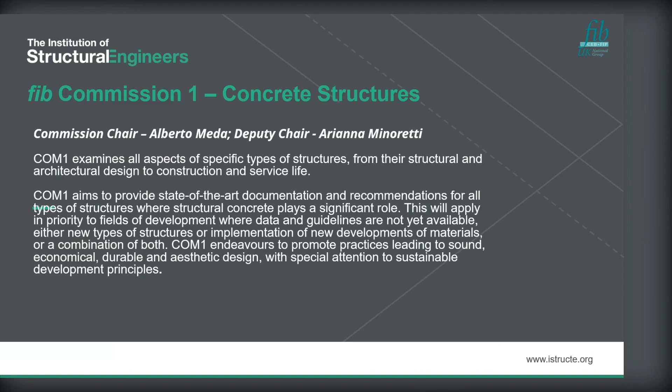Within each of the working areas, the aim is to output various things from the different groups. Each group works on different aspects, and the output will generally form the basis of guidance, recommendations, bulletins, or state-of-the-art guidance documents. The ones coming out within the next year or so are set out on this slide. I'll go into more detail on what we're doing in Working Group 1.1.3 for integral bridges, which currently has a document being drafted.

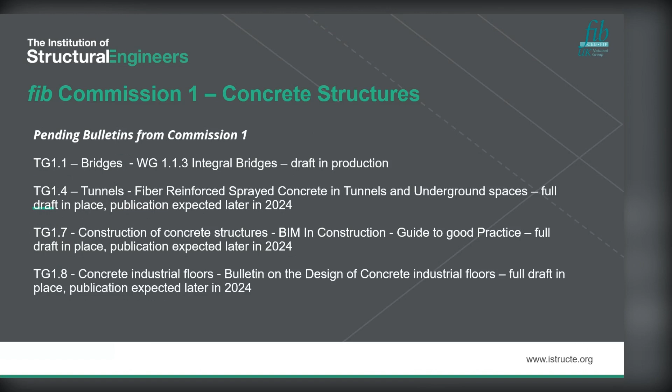Going into the detail of Working Group 1.1.3, there are 2 of us convening the group - myself and Alessandro Palermo. We have about 26 members within the Integral Bridges group from different regions of the world, 12 of which are active at the moment, actively contributing towards the state-of-the-art document we're producing.

The current state-of-the-art document is intended to pull together integral bridges design approaches from different regions of the world, highlighting how we do things similarly and how we do things differently. Most importantly, capturing how we do things so we can learn from each other, develop the best way of doing integral bridge design, and share that with the bridges community at large.

The main sections of this document will contain definitions, a general introduction, and the design basis - mostly focusing on performance criteria, loads and load combinations. It will look at analysis approaches, both simple methods and more detailed soil-structure interaction approaches for integral bridges, as well as design approaches adopted in different regions across the world. There will also be a useful section on common detailing practices and case studies.

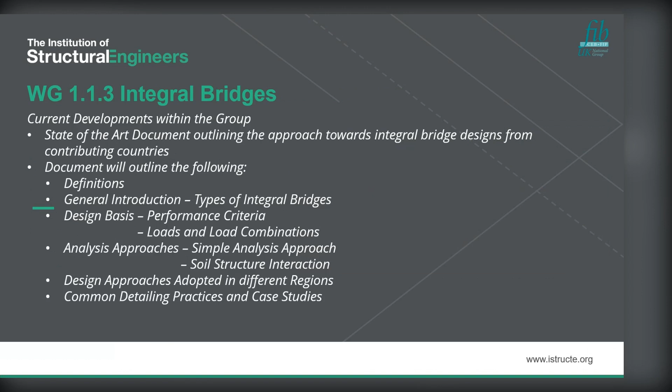Going back a slide, for those who don't know what an integral bridge is - it's basically a bridge that is all built in together. You generally have the foundations built into the abutments, with an integral connection between the deck concrete and the abutment concrete. This means you essentially remove the need for complex joints and bearings within the section.

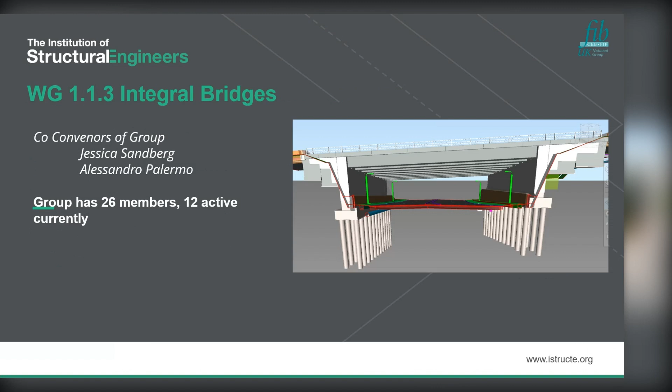The reason we tend to promote this is that it generally leads to lower whole life costs, less maintenance, and less disruption to the network. Most of our clients are quite keen on using these structures because it helps make road and rail networks easier and less disruptive.

I find this quite a useful slide as it highlights how different regions do things differently. We haven't got a full list of all countries yet, but this illustrates the general differences between some countries. For instance, Finland tends to do integral bridge design between about 50 to 90 meter spans, with steel being limited quite a lot more than concrete bridges. There's a general trend in many parts of the world where concrete integral bridges tend to be longer than steel ones.

The exception is probably the UK, where we don't really have limitations on the length of integral bridges depending on concrete or steel - it's just the same limits for both. Not all countries define the same limitations on when you're allowed to use integral bridges. Some define it based on movement range, and others on the total length of the bridge.

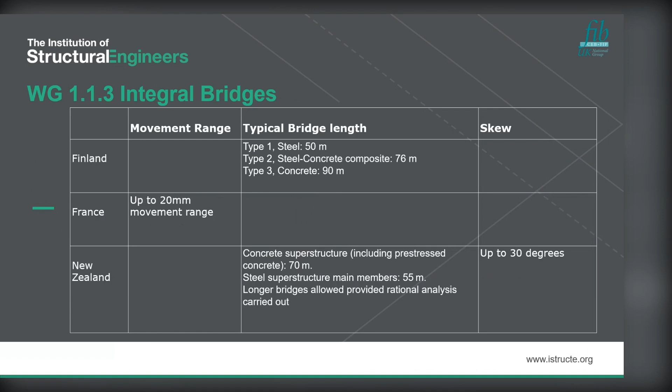And then there's also some limitations on skew. This slide goes on to give a couple of other limitations for other examples. The key outlier here is clearly the United States, where they build some very, very long integral bridges, though the length of the integral bridge tends to be state dependent.

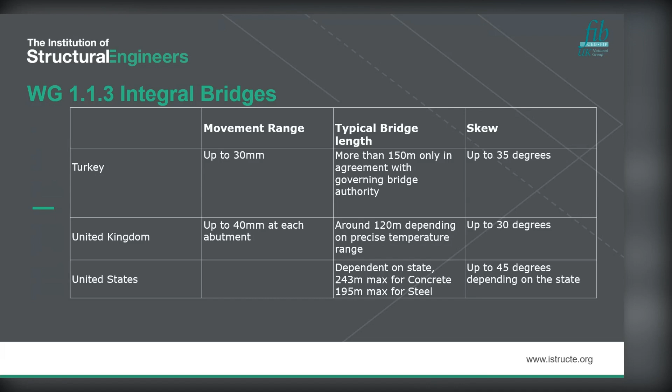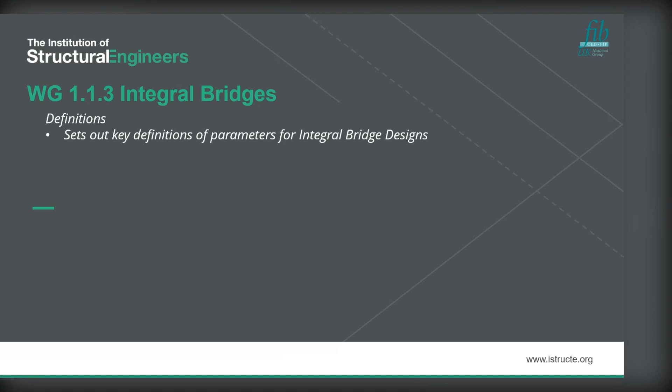Within the definitions, this is quite an important part of the state-of-the-art document, because we have to have an agreed set of terms that we use to define the structural design. It's taken a fair bit of work to get a set of definitions we can all agree on, because it turns out we all use slightly different terms and define things in slightly different ways.

You also have embedded wall abutments, which tend to be contiguous pile walls, used for top-down types of construction. Flexible support abutments are abutments where you've got a column that goes through a manhole ring or something similar that separates it from the soil, which then limits the amount of earth pressure that you mobilize behind the end of the abutment.

The earth pressure is the main component of the interaction between the soil and the structure itself. And then you've got semi-integral abutments, which are sort of integral bridges with bearings, but without the complex joints at the surface carriageway level.

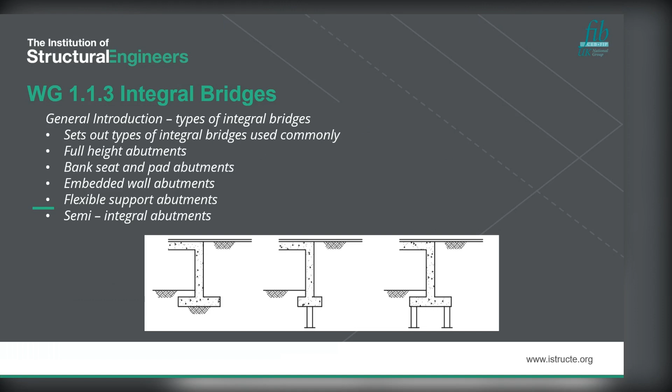There's some interesting work being done in France at the moment, where they are retrofitting some existing structures and turning them into semi-integral bridges. So bridges that previously had joints in the deck are being turned into semi-integral structures, which I believe is giving them a maintenance improvement on the road network they've got.

We will then have a section looking at the design basis, mainly focusing on performance criteria. This will focus on the fact that when doing integral bridge design, the flexibility and stiffness of both the structure itself and the soil tends to be quite important in determining the load effects you have, and the amount of thermal movement that you get.

So the expansion of the bridge causes the deck to move into the soil, mobilizing a semi-passive soil resistance that effectively mobilizes load within the abutment. The more flexible you can make the system, the less load you have getting locked into that system, and the easier the structure then becomes to design.

The key to this section will be how different regions address these issues of how we quantify the semi-passive soil resistance, which in the UK we refer to as the K-star soil pressure, and other regions tend to refer to as passive soil resistance, depending on the soil movement. It all depends on which region you're in.

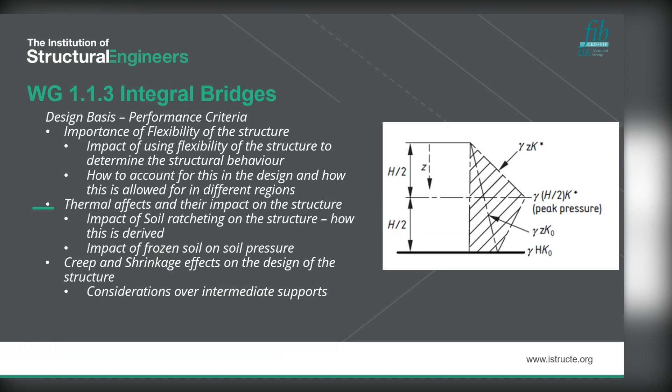So another thing the design basis section will look at is loads and load combinations. This might seem a little bit obvious, but it turns out that we all tend to consider temperature and soil pressures in different combinations depending on where you are. Not everyone considers temperature relevant to the ULS design, and a lot of regions will just look at the SLS combinations in terms of the temperature design.

That means that for an integral bridge design, because it's dependent on the overall expansion and contraction due to temperature, SLS will be the load combination that you design for. In the UK, we very much take the approach that temperature forms part of the ULS combination, and ULS will tend to form a large part of our design. So again, it's highlighting how this is treated differently and what the key components are.

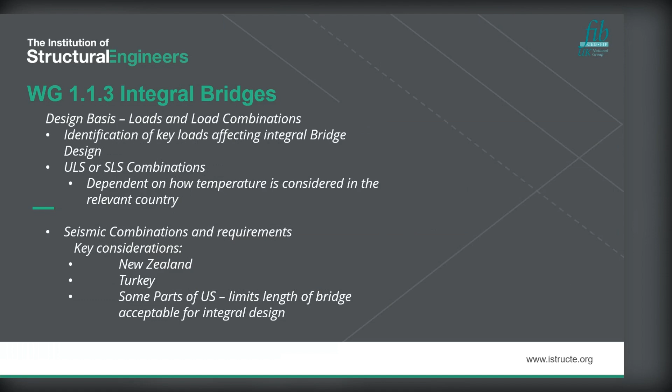It's also looking at the importance of the seismic combinations and how this adds additional considerations to your design. This was primarily coming out of countries like New Zealand, Turkey, and some parts of the US, where seismic actions are quite a lot more of concern than they are in places like the UK or Northern Europe.

The idea is also to look at different analysis approaches. In the UK, we use the limit equilibrium approach. In other regions, you use a modified passive earth pressure derived based on the temperature movement.

There's also some additional considerations when you go a little bit further north. For instance, Finland and other parts of Scandinavia have to deal with frozen soils, and those frozen soils mean that different earth pressures are then mobilized when you are doing the design of the structures.

That adds an additional complication to doing integral bridge design. It's also one of the reasons why lengths of bridges are a little bit more limited as you go further north in Europe, because the negative temperatures in the frozen soil lead to much higher earth pressures being applied to or mobilized by the structure as you get expansion into the frozen soil. So it's more applicable when you get into the ranges of around -20 and that sort of area.

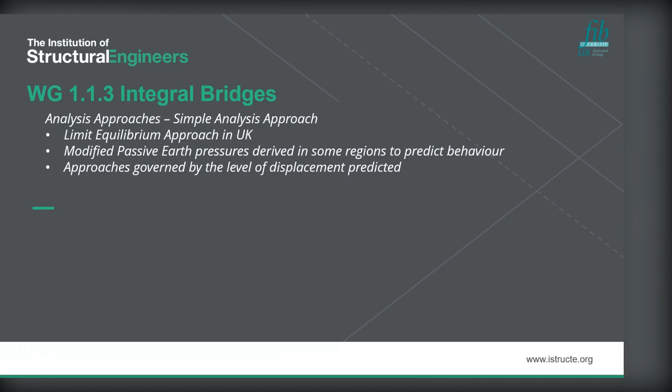We're also looking a bit at more detailed soil structure interaction. There's not going to be a huge section on this, but this is an approach where you go back to first principles and look at the soil constitutive models and non-linear soil properties, and then carry out an analysis for the non-linear soil properties, which are used to inform your design of the structure. Generally this involves iteration between a structural analysis model and a geotechnical analysis program that does the soil analysis, and it's generally quite an iterative approach in order to develop the earth pressure that you end up acting at the back of the abutment wall.

There are some areas where more detailed methods of soil structure interaction are beginning to be developed, for shorter structures such as culverts and buried structures, but we're not yet doing it for larger bridges, or at least I haven't heard of anything being done yet.

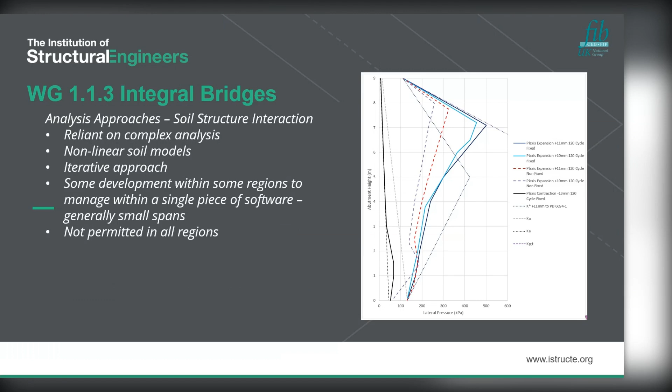Doing more detailed soil structure interaction is not permitted in all regions, and generally it requires quite a lot of calculation backup and references to research material and verifying the soil models in order to be able to use it, and that's fairly consistent across the world.

So the final, or one of the penultimate sections, will then deal with design approaches. We've touched on this already, but it looks at the empirical approaches that we use versus using more detailed modeling to develop the soil structure interaction behavior between the structure and the soil.

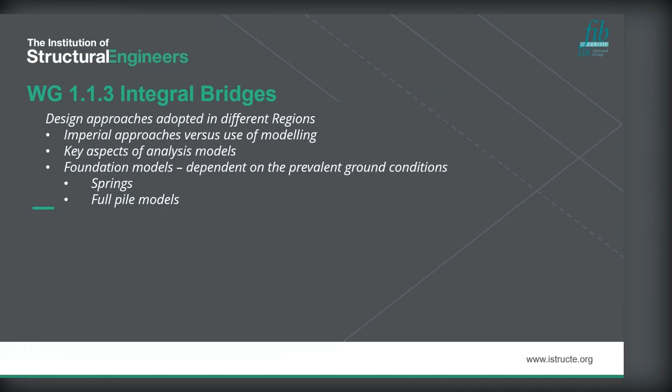It will look at the key aspects of different analysis models - what bits are particularly important when you develop an analysis model, and how do you model the foundations. It will be slightly dependent on the prevalent ground conditions, but it tries to put together some recommendations regarding springs, full pile models, equivalent cantilevers, and different ways of modeling foundations, and trying to pick up how that is done throughout the different regions as well.

The final section of the document will then focus on common detailing practices and case studies. This is probably one of the more interesting parts of the document, because it highlights how much we actually have in common in how we do our detailing, but also highlights how things are done a little bit differently. It's been quite a useful learning experience to look at other detailing practices, seeing what we can learn from how others are doing things, how we are doing things, and sharing that knowledge to develop better and better details for integral bridge designs.

This section will look at things like run-on slabs, which aren't terribly common in the UK due to maintenance issues that we've found with them, but they are commonly used in places like the US and most of mainland Europe.

Also looking at different types of foundations. For instance, H-piles tend to be very commonly used in the US, while in the UK we tend to use much more robust foundations, and there tends to be a mix of this depending on where you are. So again, it's capturing all those details together and putting together a discussion about which ones work well, how they work, and what you need to design for when you consider them.

Also looking at joint connections at the road, asphaltic plug joints and other things, because this is quite a critical aspect of the integral bridge design, how you join it to the rest of the road and how you deal with the maintenance part that goes together with that.

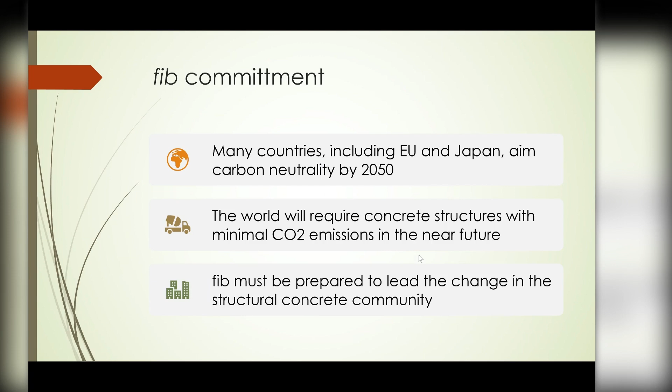Actually, construction materials can play a different role towards the climate change phenomenon. And if we try to quantify the amount of embodied energy and embodied CO2 that are strongly correlated in many cases, we can see that if we quantify these quantities per mass, per volume of material, concrete actually performs very well, because the embodied energy per kilo and the embodied CO2 per kilo is one of the...

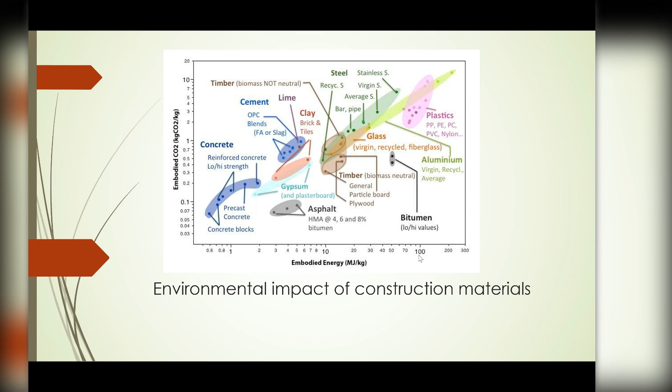...lowest embodied energy and embodied CO2 if compared with other materials that are typically used in the construction industry, such as plastics and steel and others. But the amount of concrete that we use makes concrete one of the most relevant industries within the construction industry, the larger construction industry, causing CO2 emissions and the emission of gases causing climate change.

Because we use nearly 1 ton per year of cement per person worldwide, and cement is, for many years, we use this image to share with the community the importance of cement in this phenomenon. Cement is the most used substance on earth after water. It can be estimated that 50% in weight of whatever we produce in the world is made of concrete, for the amount and weight of concrete structures.

And any alternative to concrete that we can imagine would not be scalable due to the unavailability of alternative materials. So you can find many research activities in scientific and technical literature dealing with geopolymers. Geopolymers can be very good alternatives, probably performing better in terms of CO2 emission, but they cannot be used as a real alternative because they cannot be scaled up to the amount of cement that we use for concrete structures in our industry yearly.

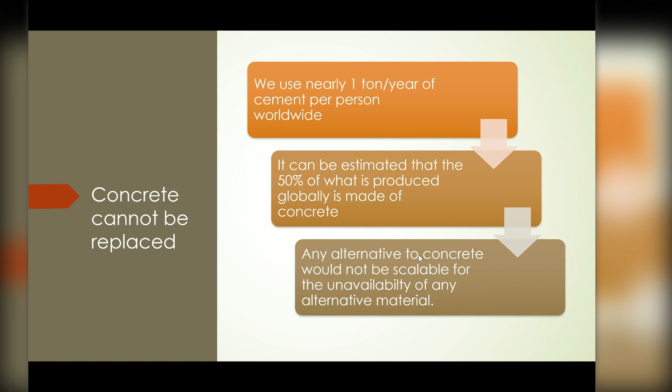But we need to identify strategies to reduce the emissions caused by the concrete industry. And I want to share with you this graph produced by the Global Cement and Concrete Association. You can see the CO2 emissions caused by concrete, and at the top of the curve you can see the expected increase of CO2 emissions from 2020 up to 2050. You can see that it's going to be more and more.

That's why this is because the amount of concrete structure that we expect to produce yearly will increase year by year, driven by the request of the developing countries.

And then we need to identify possible strategies to reduce the CO2 emissions. We can identify different strategies that likely could be stressed to reduce this amount and to get the target of zero emission by 2050.

And we can see that efficiency in design and construction, efficiency in concrete production, and saving in cement and binders plays an important role into this strategy that is here proposed.

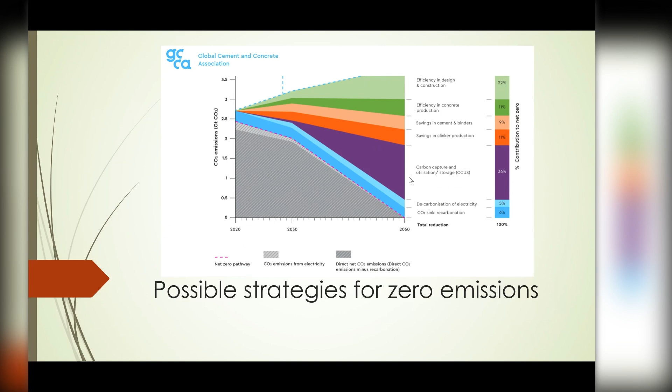So the role that structural designer can play towards this objective is important, and we need to get the awareness of this role, and to use this awareness into the strategies that we adopt day by day when we design reinforced concrete structure.

But then, very practically, we can deal with 4 directions for reducing CO2 emission, and we can manage this objective. One, the first direction is dealing with alternative binders to normal cement.

Dealing with binders that can present different strategies in scientific and technical literature are being investigated and can be adopted now and will be available in the future as alternative to normal cement. But anyway, many of these are still cement based.

Then the second direction we can identify is dealing with new mix design to reduce the amount of cement, dealing with admixtures and with new recipes to produce concrete that can exhibit the requested mechanical and physical performance that we need in our design, but with a reduced amount of the binder of the cement.

And then the third direction is optimizing structures. We can try to work on the amount of reinforced concrete that we can use in our structure. And so new methodologies, more sophisticated design procedures, and more sophisticated models can support us to optimize the structure, and so to have equivalent performance, the same performance for the wall structural systems with reduced amount of reinforced concrete.

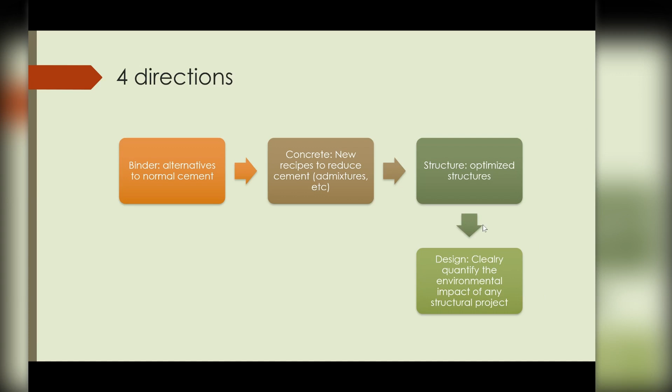We need to manage these numbers so to deal with the alternatives, to identify and assess the different alternatives that we can imagine into the structural design of any single structure.

So the SAG Sustainable Initiative, even if Commission 7 was still active and is a stable commission in fib, decided to trigger a new initiative. SAG stands for, is the acronym of Special Activity Group on Sustainability.

We started this new activity with 3 clear objectives. We want to communicate and to enlarge the awareness of the environmental impact that reinforced concrete structure and the design of reinforced concrete structure cause in terms of CO2 emission.

And we want that the community of the designers enlarge their awareness about this, are made able to quantify and to manage this aspect into their design.

So we have 3 clear objectives: a comprehensive database of the environmental impact of concrete structure and concrete components and structural systems related to concrete structure.

Then we want to propose a reliable and feasible methodological approach to support designers to quantify the environmental impact of a concrete structure into their single projects.

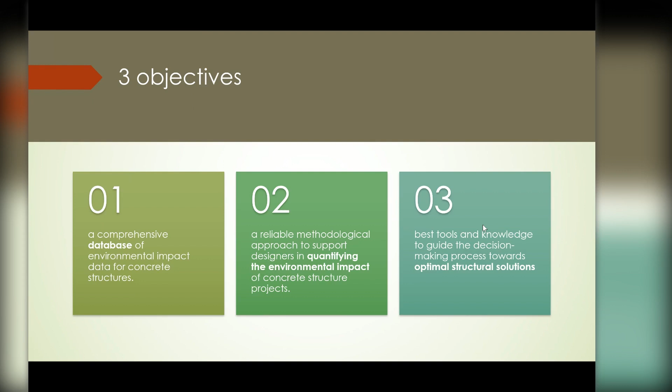And then we want to support the designers with tools and knowledge and benchmarks to guide the decision-making process of any single project towards optimal structural solution, and so the optimization of the environmental impact of any single design.

Practically, we expect to have 3 main outcomes. We want to propose a platform for the environmental impact inventory data of reinforced concrete elements and components and systems.

To make it available for the members of our community to let them investigate and quantify the environmental impact of their design. Then we want to produce a report on the methodology to support designers dealing with this kind of calculation, and possibly this can be in a sort of product category rule for structural concrete.

Who is familiar with this matter, with the ISO 14000, understand what is a product category rule. It is a sort of guideline to support the quantification of the environmental impact for any industrial product, and we would like to deal with this with the product reinforced concrete structure.

And then we expect to have a report on optimization strategies and best practices on this topic. The target audience of our SAG is clearly designers, but also policymakers and society in general.

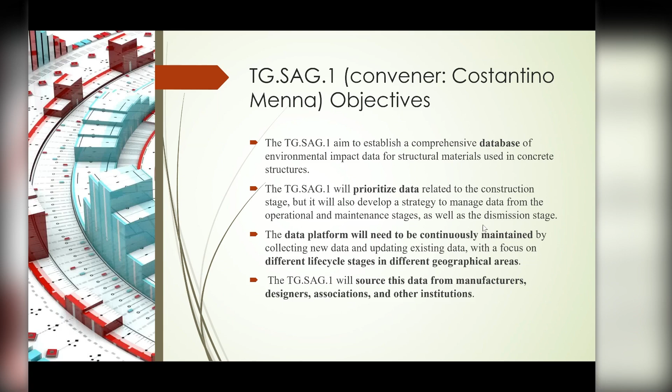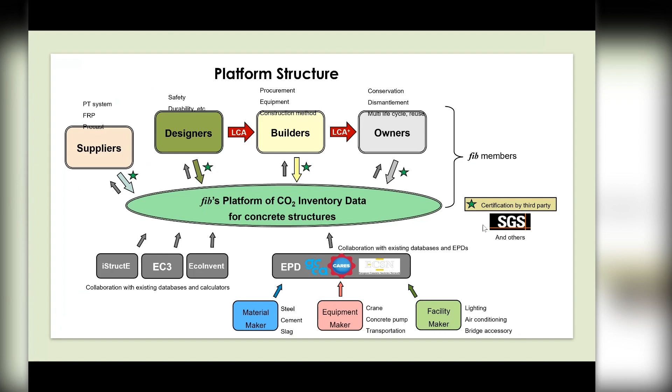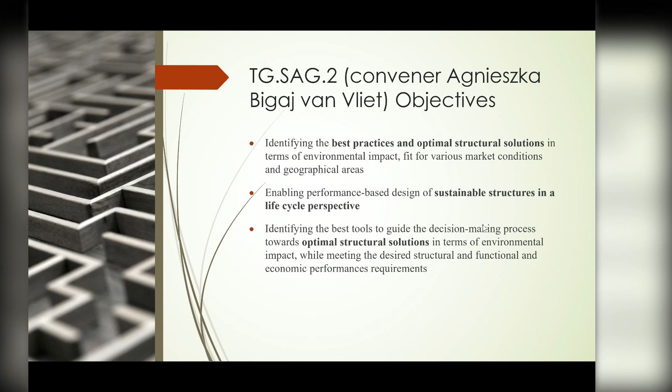The second task group's objective is the identification of best practices and optimal structural solutions, so as to share with the community the opportunities, pros and cons of different approaches, and the technological and methodological novelties for managing environmental impact quantification in structural design processes.

This topic is high risk, high gain, because we are aware that we are dealing with a matter that is really complex and complicated, and that our community is not familiar with these topics. But we imagine that this work can be fruitful, because we believe our community will be reactive on this topic.

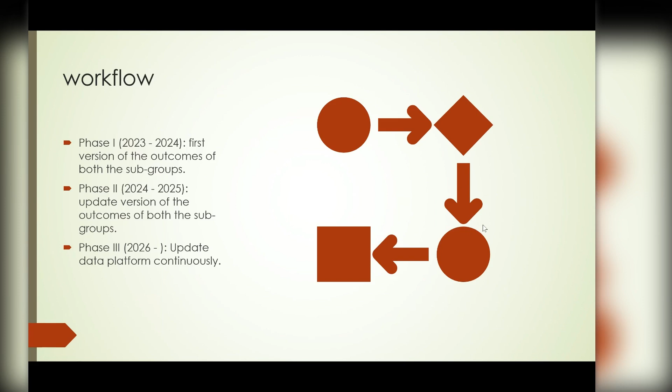So we have a workflow that we expect, within the next 2 years, to get the outcomes I have described, and then for the data platform, to start with continuous updating of the data.

As a final word, a few words about COM7 task groups. COM7 is dedicated in this scenario to the vertical dealing of specific topics, and so we now have 5 task groups active, working on the general framework of sustainable concrete structures, and the environmental product declaration for concrete products.

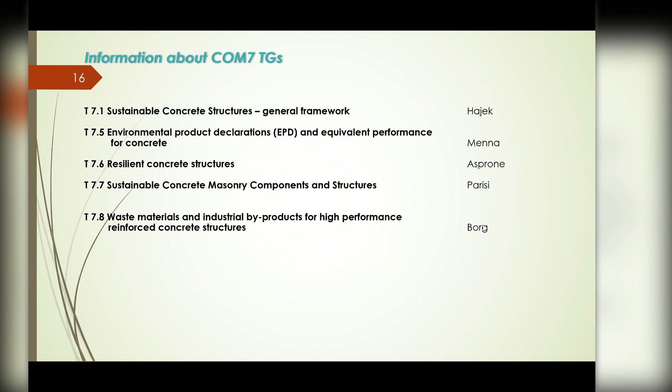Resilient concrete structures, sustainable concrete masonry components, and the management of waste materials and industrial byproducts for high performance concrete structures. Thank you for your attention, and I really hope that you can engage in this activity.

And contribute from fib UK with your passion and your work on this topic. Thank you very much.

Just a small clarification: we're talking about Model Code 2020. The 2020 refers to a sort of timestamp on the technology the code is based upon, not the publication date. I'd also like to recognize and thank two of my colleagues involved in the management of Task Group 10.1: Agnieszka Bigaj, who was the deputy convener, and Gerrie Dieteren, who was the technical secretary of that group. They've worked very assiduously over a period of 8-9 years.

So let's get underway. Today I'll give a brief insight into the historic development of the fib Model Code, outline the conceptual scope of Model Code 2020, overview its contents, and then talk a little about the philosophical basis for the code, i.e. that it's a sustainability-driven, performance-based approach to design, execution, and lifecycle management of concrete structures.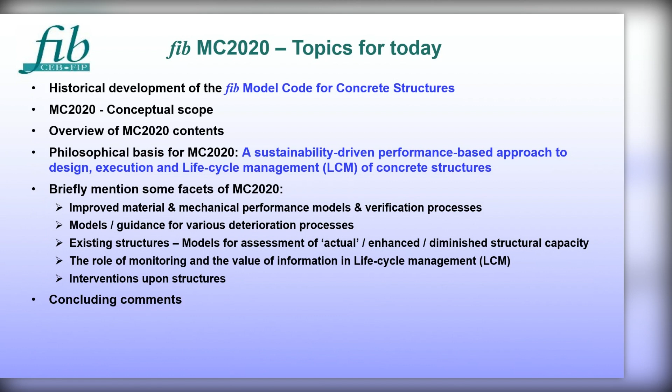Of course, with existing structures we must recognize the need for interventions, and I'll finish with some concluding comments. But to start, I'd like to emphasize that the engineering core and technical processes of Model Code 2020 still utilize familiar design approaches such as limit states or limit values, associated with reliability thresholds, taking into account relevant reference periods.

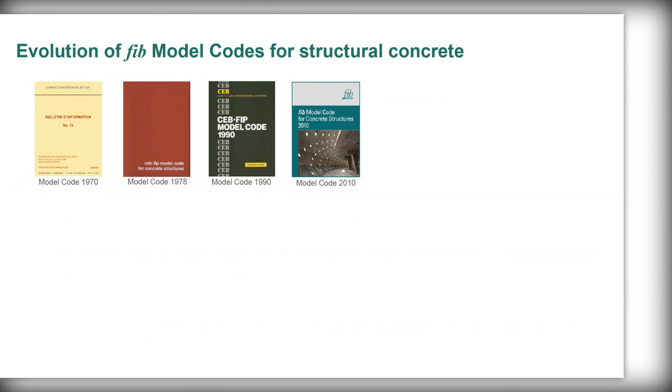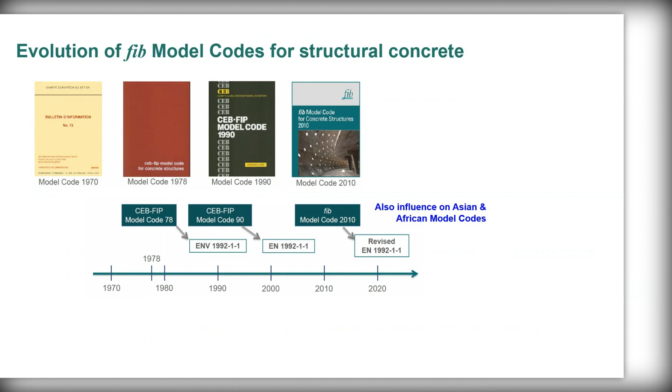Moving on to the evolution of the fib model codes, there have been 4 up to now: 1970, 1978, 1990, and the last one, Model Code 2010. These codes have contributed over a wide range of years to the development of the EN code, EN 1992, but have also influenced the development of Asian and African model codes.

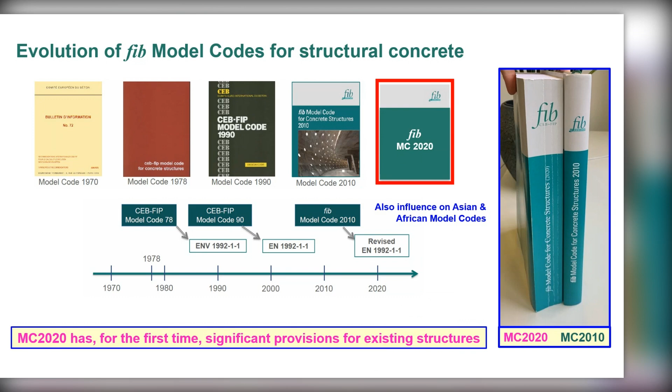But the project I'm talking about tonight, Model Code 2020, is the first time significant provisions have been included for dealing with existing structures. The graphic on the right is Model Code 2010, a hardback volume, and on the left is a galley proof for Model Code 2020 used in the checking process for its preparation.

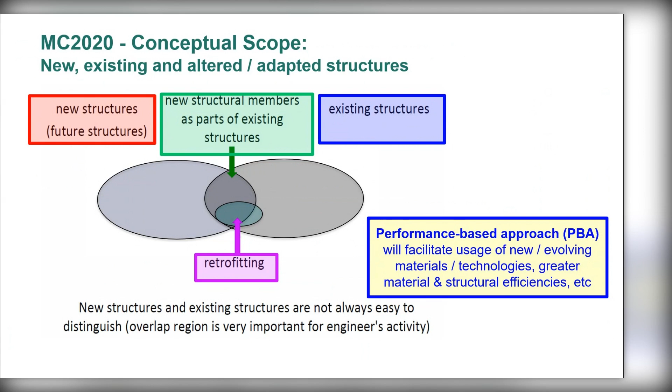Model Code 2020 deals with new, existing, altered, adapted structures, which includes retrofitting new structural elements in parts of existing structures, interventions for various reasons, strengthening, extension of life, and so on. But of course, a critical element of this is the performance-based approach. And we hope this will facilitate usage of new and evolving materials or technologies and lead to greater material and structural efficiencies in time.

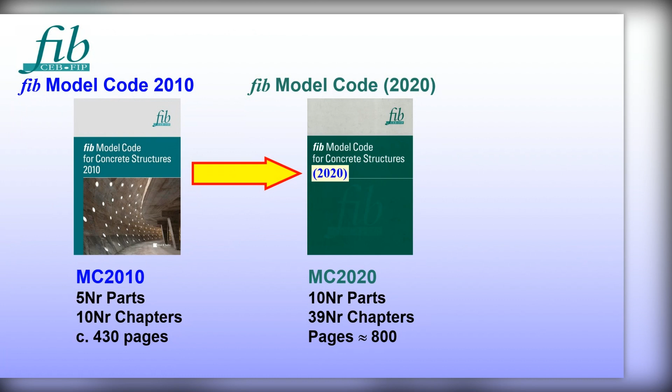Our starting point, as you might expect, was the previous code, Model Code 2010. That was prepared in 5 parts, comprising 10 chapters and about 430 pages. Model Code 2020 is in 10 parts, 39 chapters, and is in the order of about 800 pages. So it has a greatly extended technical scope and coverage.

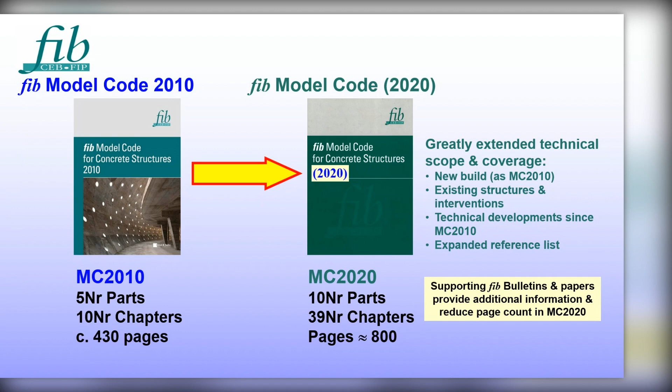Of course, it deals with new build as did Model Code 2010, but there's considerable growth in its content to deal with existing structures and their management and interventions upon them. And the new code takes into account technical developments which have occurred since the preparation of Model Code 2010. There's additional things such as expanded reference lists and related factors. But what I'd like to point out is that supporting FIB bulletins and technical papers have been prepared, which provide additional information so that it's helped reduce the page count in the code, but provides useful additional insight into the code and the operation of the philosophy.

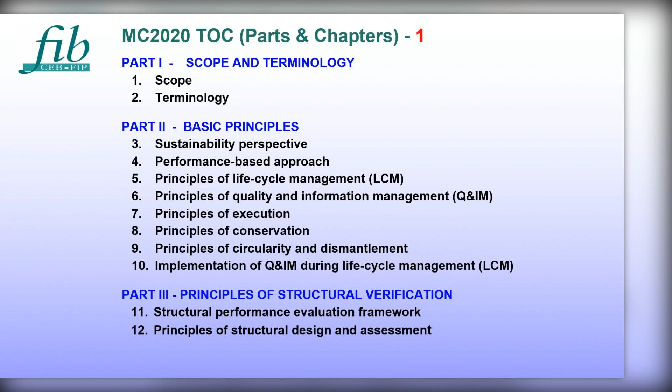and of quality and information management adopted for the code, as well as principles of execution, conservation, and circularity and dismantlement, as well as the implementation of quality and information management for or during the lifecycle management of existing structures. Part 3 deals with the principles of structural verification in chapters 11 and 12, covering structural performance evaluation and the principles of structural design and assessment.

Moving on, part 4 deals with actions on structure, so that's a new component in the code relative to Model Code 2010. Part 5, input data for materials, comprises chapters 14 to 19, which deals with concretes, reinforcing steel, pre-stressing steel and pre-stressing systems, non-metallic reinforcement, fibre reinforced concrete, as well as materials and systems for protection, repair and upgrading. Obviously, these are required particularly for existing structures, but may also be incorporated in the design of a new structure.

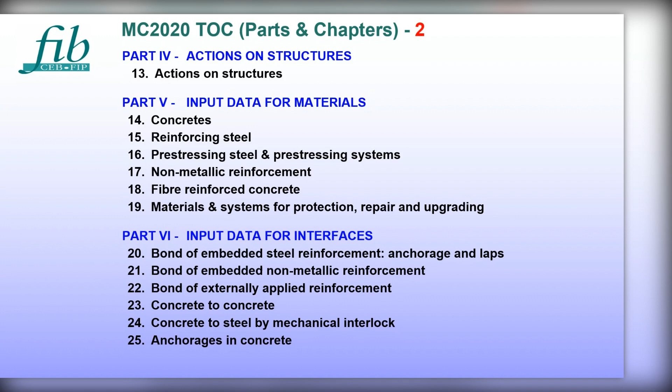Part 6 deals with input data for interfaces. As we have more materials, we have more interfaces than Model Code 2010. This part comprises chapters 20 to 25: bond of embedded steel reinforcement, so anchorages and laps, bond of embedded non-metallic reinforcements, bond of externally applied reinforcement, as well as new concrete being applied on top of existing concrete or old concrete. Concrete to steel, so the steel in this aspect is structural steel sections where the bond is achieved by mechanical interlock, and chapter 25 deals with anchorages in concrete.

In part 7, design and assessment procedures, we come to the main technical content of the code. This comprises chapters 26 to 34, sets down the conceptual approach to design and assessment, as well as the detailed approaches to design and to assessment. Chapter 29 is concerned with structural analysis and dimensioning. And chapter 30 concerns evaluations, which is a different word, which means really verifications of structural performance. So this is a very major component of the code and a very large proportion of the code document.

Chapter 31 deals with evaluation of other aspects of social performance, which I'll come back to in a moment. And 32, evaluation of environmental performance. So this comes back to and uses tools such as life cycle assessment and evaluation of economic performance, linking to life cycle costs. And chapter 34, very significant, important chapters dealing with sustainable decision making.

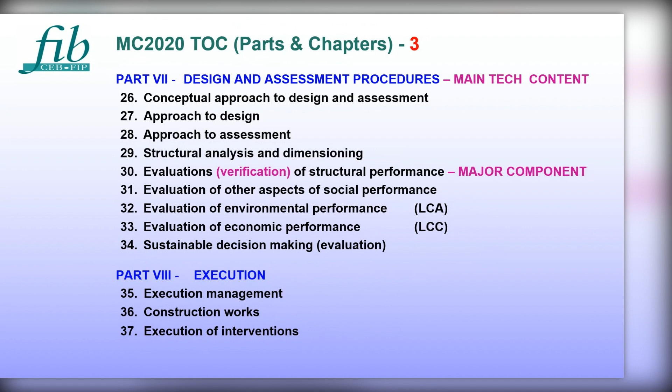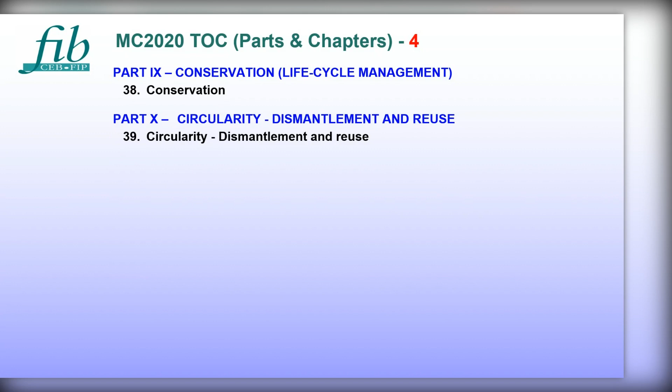Part 8, execution, chapters 35 to 37 deals with execution management, construction works, and of course, execution of interventions, which may be for extension of life, upgrading, or the like. Part 9 deals with conservation, which is another term for life cycle management, and part 10 deals with circularity, dismantlement and reuse.

The draft Model Code 2020 was formally approved by the vote of the FIB General Assembly at its meeting in Istanbul on the 4th of June last year. And since then, we've been busy preparing a publication version of the code, which has involved the FIB Secretariat and the Model Code 2020 Secretariat.

I'm pleased to say that a hardback version of Model Code 2020 should be available in April 2024. So not long now.

This achievement has been a truly global effort. We've had more than 1,400 people from 67 countries involved as authors, reviewers, or making other contributions over the time it's taken to develop the code. We've been very grateful for the support of FIB's 40 national member groups in this work.

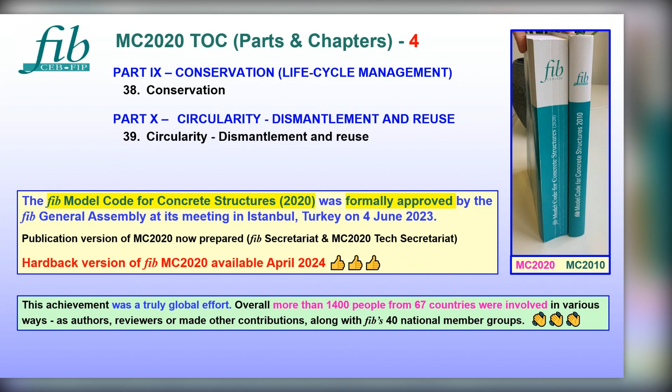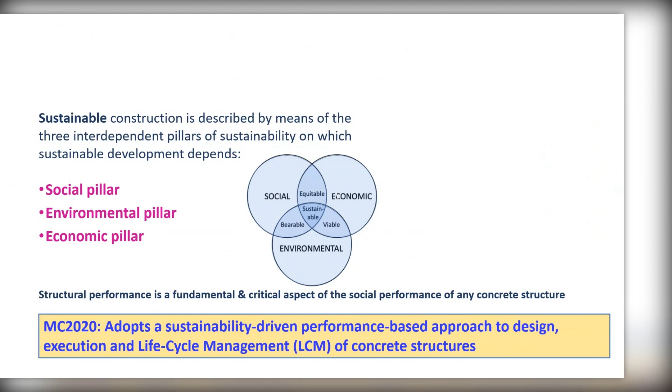Model Code 2020 adopts a sustainability-driven, performance-based approach to design, execution and lifecycle management of concrete structures. This relates back to the three pillars of sustainability: the social pillar, the environmental pillar, and the economic pillar. What Model Code 2020 seeks to achieve is the ability to design structures achieving a satisfactory balance between the influences and requirements of these different pillars.

I should draw attention to how the social pillar has been divided into two aspects: structural aspects, meaning structural safety and related functional performances—the conventional engineering issues we're used to designing for—but also, in terms of the wider application of the social pillar, non-structural aspects such as health and quality of the built environment, security and safety, aesthetics and cultural heritage, as well as impact on the local community. There may be other facets for other particular projects.

We've heard from the previous speaker about the need to reduce the embodied carbon footprint of construction and release less CO2 to the atmosphere, so new thinking needs to be developed and processes are changing. The graphic here on the left shows, on the vertical axis, the CO2 reduction potential in various phases of a project. The horizontal axis concerns planning, design, building, and operating. You can see through the life of the project how the potential for reduction of CO2, or effects upon the environment, reduces.

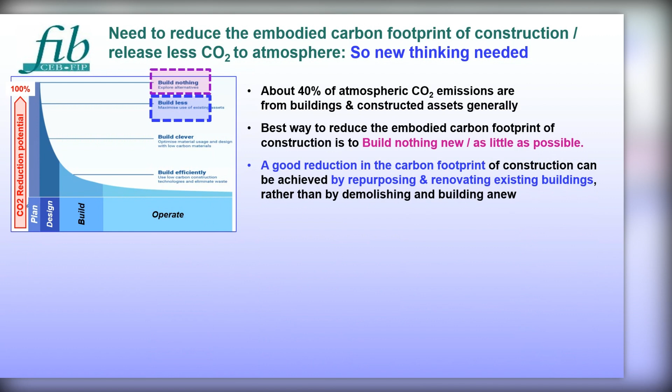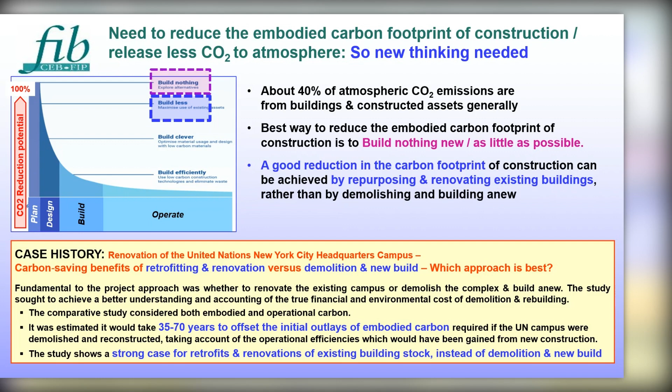I have a case history concerned with the renovation of the United Nations New York City headquarters campus. This study looked at the carbon saving benefits of retrofitting and renovation versus demolition and new build, to try to find out which approach is best. It was found that it would take something like 35 to 70 years to offset the initial embodied carbon outlays if the existing UN campus were demolished and reconstructed—and that estimate took account of operational efficiencies gained from new construction and new materials. So the study shows a strong case for retrofits and renovation of existing building stock rather than demolition and new build.

In terms of adaptations of existing assets, I found two examples of converting grain silos into other uses. You'd think a grain silo was a pretty tough project to adapt to something else, but these are rather interesting.

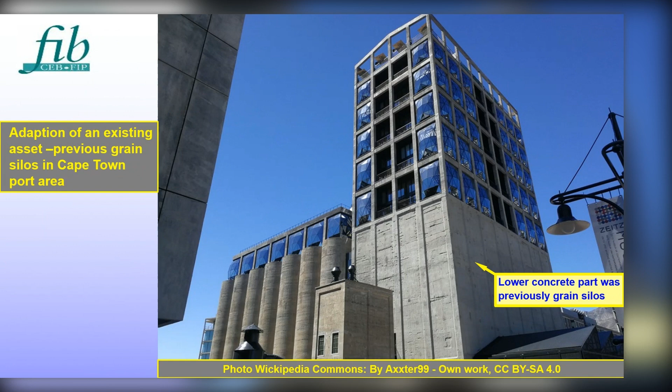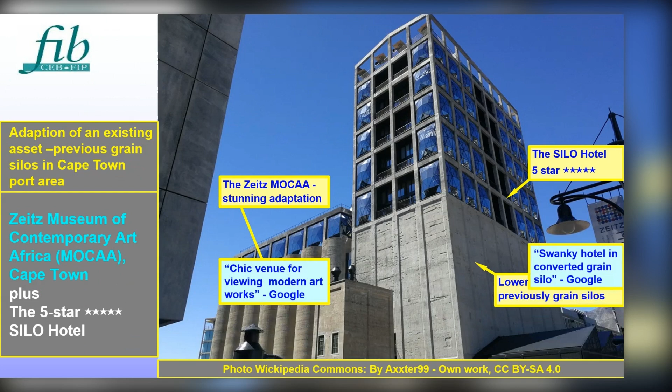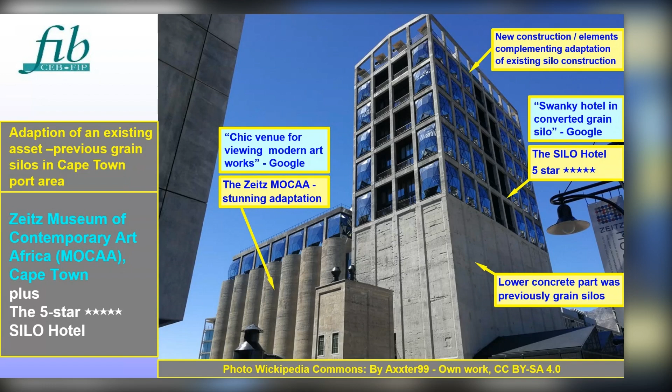A similar but very prestigious project in the port area of Cape Town saw the existing grain silos, shown here as the concrete elements in the picture, converted into two entities: the Zeitz Museum of Contemporary Art Africa, known as the MOCAA, and a 5-star silo hotel. You can't see the conversions made within the concrete silos, but there were other works in terms of new construction elements built above the existing structure, complementing the adaptation. Very interesting project, very central to the redevelopment of those port areas.

Now, why is a performance-based approach to sustainable design, execution and lifecycle management important? I think we all appreciate our world is changing greatly and increasingly quickly, so we urgently need to do things differently.

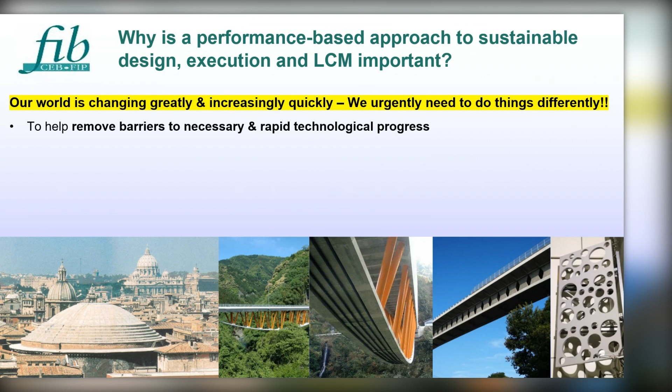It's hoped that a performance-based approach can help remove barriers to the necessary and rapid changes in various forms of technology that we use in construction. This will facilitate the uptake of these new changed technologies and hopefully lead to reduced embodied carbon and reduction in the footprints that the construction industry has and its release of CO2 into the atmosphere.

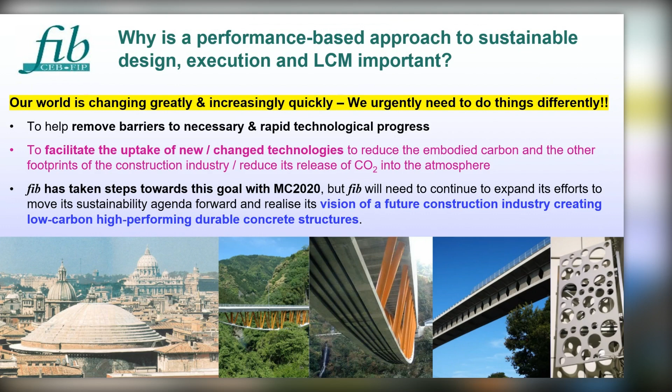The picture on the left-hand side is the Pantheon, and there are various other pictures from places around the world showing various forms of advanced materials and new forms of construction. FIB has taken steps towards this goal of a performance-based approach within Model Code 2020, and I'll explain a little bit more about that in a moment.

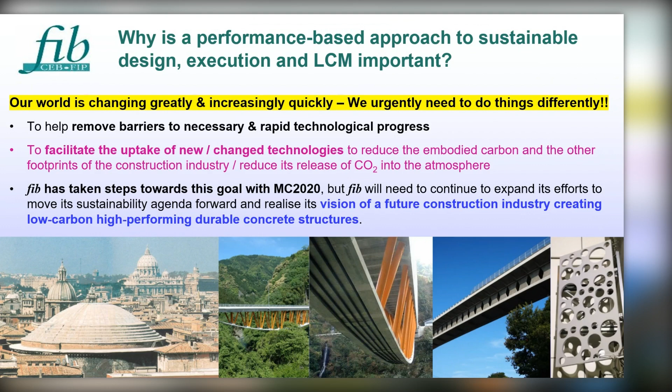But FIB needs to continue and expand its efforts to move its sustainability agenda forward and realise its vision of a future construction industry creating low carbon, high performing, durable concrete structures, as you've heard from the previous speaker.

Now, in terms of performance-based approach, I'll give you a simplified illustrative example. In this example, we're considering 4 tiers. The top tier would be the owners' and users' higher level performance or outcomes-based requirements - these are societal and functional requirements.

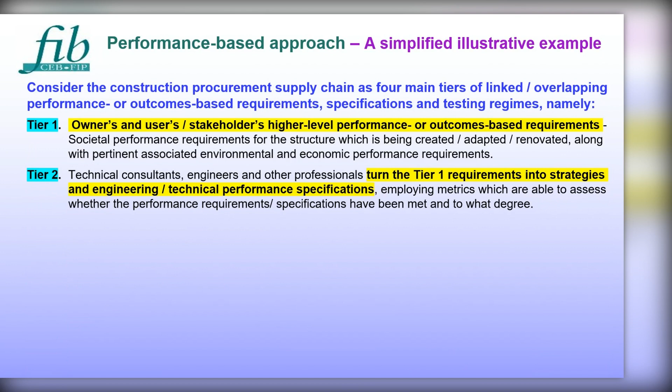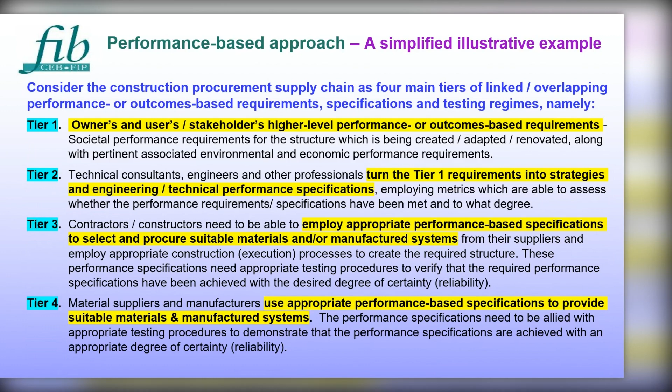Then Tier 4, in this example, the material suppliers and manufacturers would use, again, performance-based specifications to provide suitable materials and systems, but that would be linked to appropriate test procedures to demonstrate that performance specifications are met with an appropriate degree of reliability.

So what are the higher level performance requirements? Well, clearly human and environmental safety and risks are pretty significant, pretty important. Think factors like the design service life, the working life, the functionality, the key performance metrics for the entity which is to be constructed, durability, longevity, the prospects of deterioration, what the serviceability limits are.

The operational aspects, how they need to be defined, robustness and seeking to limit vulnerabilities, resilience of functionality of the entity - the bridge, the rail system, the dam, etc. - which may be being created. And of course there are other aspects of functionality, perhaps adaptability, appearance, impact on the local community, heritage, and a significant factor in this changing, more extreme world is the tolerability of damage during extreme events and maintaining functionality.

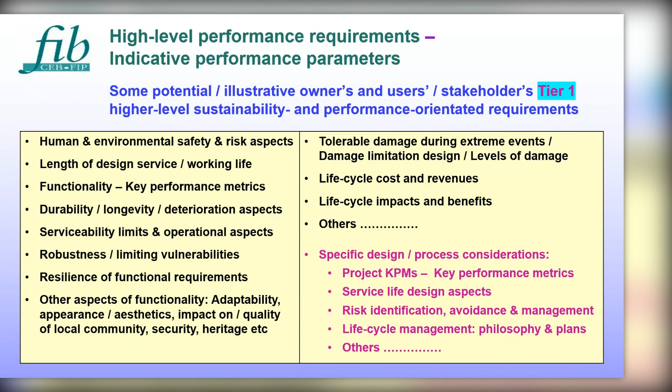But indicative Tier 2 engineering and technical performance requirements, these are the ones that we are used to working with. So target reliability levels, say for ultimate limit state, serviceability limit state, condition limit states, consequence class, design life of the structure and components, and how the service life design is going to be developed.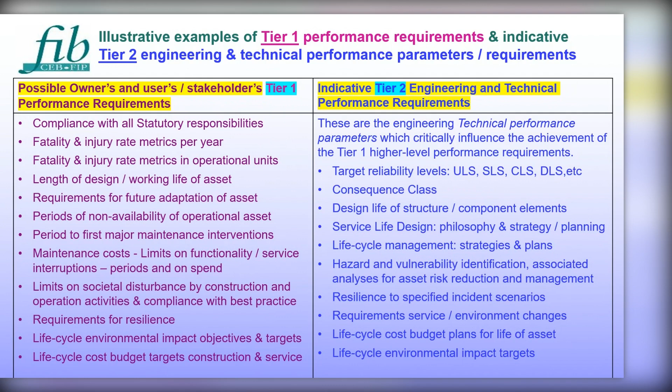The strategy and the planning required, how the structure will be managed through its life cycle management, what hazards and vulnerability issues need to be taken into account, how resilient does the structure need to be to specific incident scenarios, and what the requirements might be for service and environmental changes through the life of the structure. And of course, again, costs and environmental impacts.

And we've developed flowcharts which represent these processes. They're quite complicated. But if we take a simplified performance-based model approach, we've got the blue box at the top there, the sustainability-orientated performance requirements. The yellow box at the bottom shows the performance evaluation, the verification.

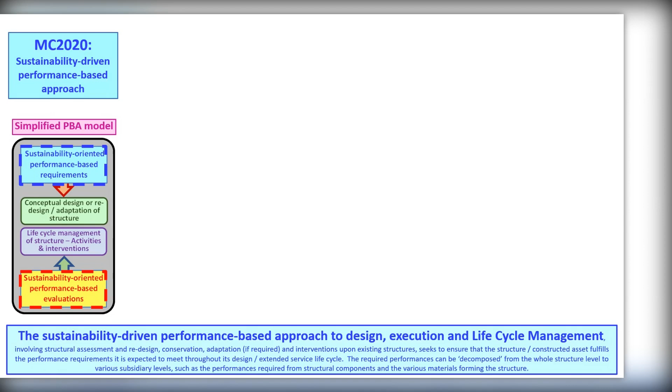And then in the middle, the conceptual design or redesign adaptation approaches employed, as well as life cycle management, so the activities and intervention processes which may be required. So they are incorporated into this flowchart, which shows the interactions, the different levels of the tiers and the way things work. But I don't have time to go into that today.

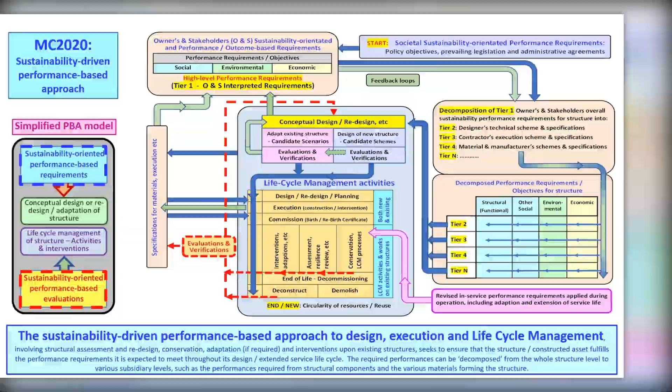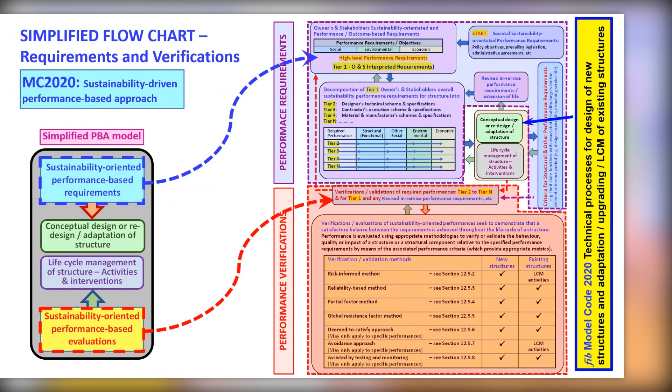But if we step back to the simplified performance model that I explained before, the processes in the flowchart I've just put up essentially come down to those elements of the activities which define the performance-based requirements - the purple area at the top, and the performance verification activities in the red zone below. But of course there's also these other activities, these technical processes for the design of new structures and the adaptation, upgrading, lifecycle management of existing structures there in the middle, which I outlined before.

So moving on, I'll just highlight some of the developments within the code. There are improved material and mechanical models.

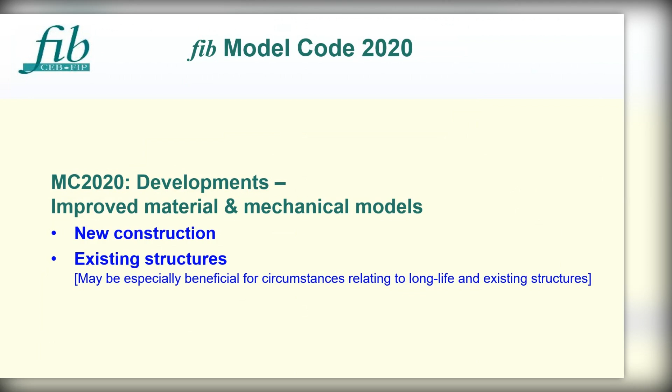These apply to new construction and to existing concrete structures, and they may be particularly beneficial for circumstances relating to long life or existing structures, which of course do suffer from deterioration.

A classic representation of these situations is shown here in the graphic on the right. The vertical axis relates to performance and the horizontal axis relates to time. The dashed blue line, which falls with time, represents deterioration effects, so the capacity is reducing with time. The red dashed line marked S is the load effect, shown to increase with time for increasing load.

But of course, that load may remain constant, so the line would then be horizontal. There are aspects of the resistance effects which may not be taken into account during design, such as compressive membrane action, perhaps increase in strength in the concrete with time, and that may justify an extension of the service life of the structure.

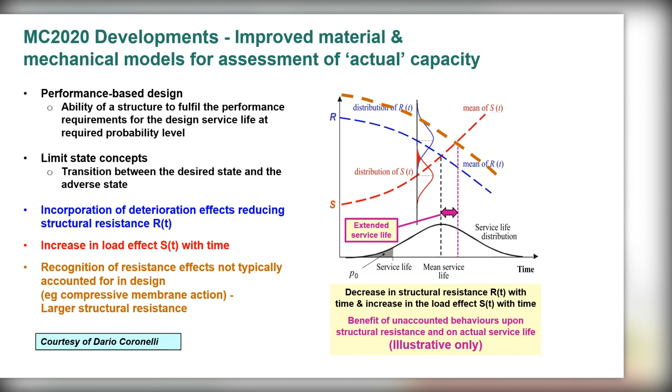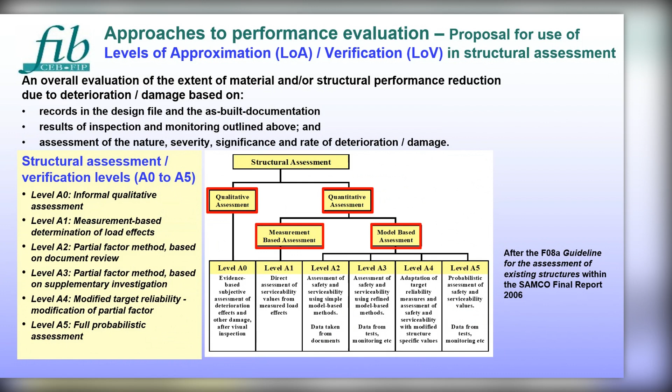I'd like to draw attention to the fact that the code incorporates for performance evaluation a variety of methods and levels of techniques, levels of approximation or levels of verification, employed in the design of new structures, but particularly for structural assessment of existing structures. In this example, it defines six levels of potential assessment or verification, broken down into qualitative and quantitative assessment processes, those which are measurement-based and those which are model-based. I don't have time to go into these, but it provides a very wide range of different procedures which can be applied.

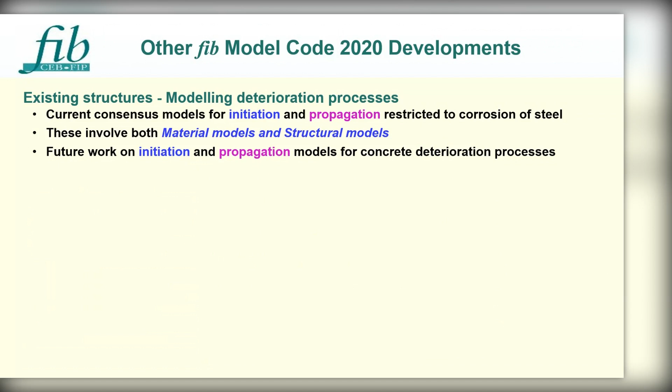Just touching upon some other developments: for existing structures, there's a need to model deterioration processes. Unfortunately, currently the consensus models for initiation and propagation are really restricted to the corrosion of steel and the effects upon concrete arising from that. These involve both material models and structural models to make an assessment of the changes in capacity. But it's fair to say that future work is envisaged on the initiation and propagation of a much wider range of concrete deterioration processes. We didn't have time to develop that in the current cycle.

Lifecycle management recognises the role of monitoring and the value of information gained from that, which helps improve the quality and safety of the constructed assets. Again, it's on the basis of that information helping justify extended useful life. It clearly provides diagnostics and assists in, say, infrastructure risk assessment and management. Maybe at some future time we'll be able to monitor safety in more reasonably real time.

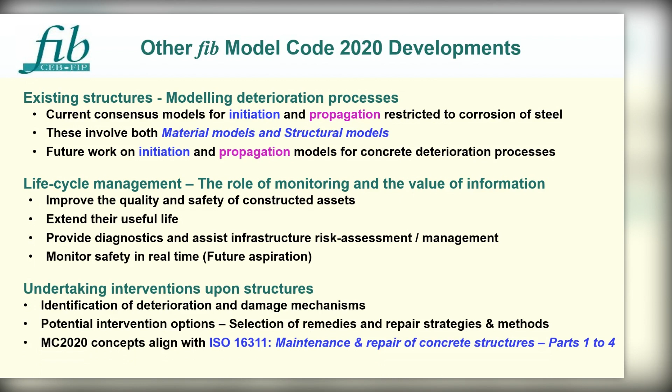With existing structures, there's a significant contribution in the code about undertaking interventions upon structures. You need to identify the deterioration or damage mechanisms in play, evaluate the potential intervention options, select remedies and repair strategies. What's incorporated in Model Code 2020 aligns with the treatment set down in ISO 16311, maintenance and repair of concrete structures, which provides a useful framework and is being further developed by ISO, saving a lot of content being incorporated into the code. So there's been a principle of referring out whenever possible rather than redeveloping.

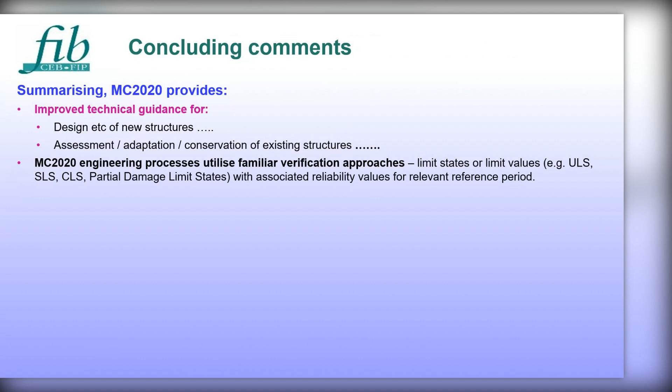Coming to my concluding comments, Model Code 2020 provides improved technical guidance for the design of new structures, as well as the assessment, adaptation, and conservation of existing structures. I'd like to reassure you that Model Code 2020 uses engineering processes and verification or validation procedures which we're familiar with: limit states, limit values for ULS and SLS, with associated reliability and relevant reference periods.

What we're seeking is that these capabilities will be helpful, or maybe critical, to extending the useful life of concrete structures and/or upgrading them to satisfy existing or revised, often increased, performance requirements, so that we can help diminish the need to demolish structures. We can adapt them, and people will have better tools for doing those things.

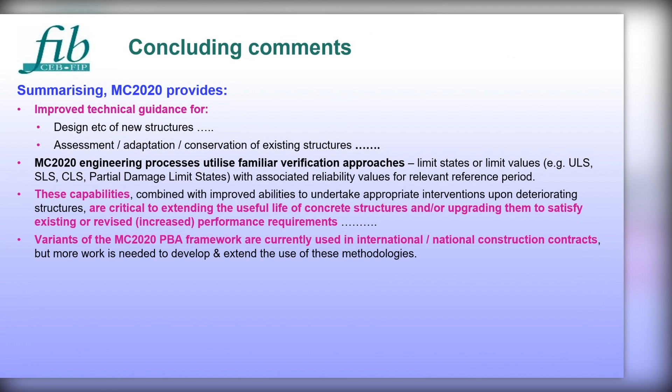I'd also point out that the performance-based framework incorporated in Model Code 2020 draws on a survey of approaches currently used in international and national construction contracts, so they're grounded in reality. But I would say that more work is needed to develop and extend the use of these methodologies—it's a work in progress for FIB and other bodies. Of course, the ultimate goal of the new version of the model code is that it's going to be better suited to the future demands and circumstances we're going to encounter in the years ahead.

There are technical papers and PowerPoint presentations and various things available on the FIB International website, which give further information on Model Code 2020. And that brings me to an end.